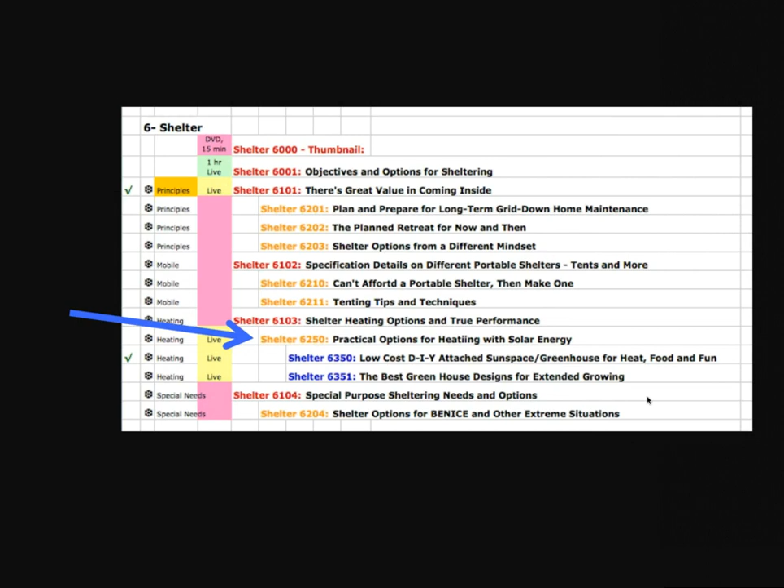Well, as you know, there's quite a long list of classes that we have been working on, many of them published or on the website, more coming. In the shelter area, this is 6250, which is one of my favorite topics, actually, because my career in years past was in the area of solar consulting and design work. The mission is to teach people as much as we possibly can to just reach out and help people get concepts of these things. And it's about the principles of how and why things work.

You see, provident living, I believe, has to be based on principles, an understanding of how and why things work, what the truth is really, not just lists of stuff. That's what's so important, because if you're just working off of a list or off of the library, so to speak, and it's not in your head and heart, then when you really need it, it doesn't just come up automatically. These 9 core preparedness modules I talk about all the time, everything that we teach is contained within them. All of the things you need to know, do, and have is contained within them.

One of the foundational laws for anybody that's new, the law of provident living, I believe, is the most important one of all. It has 4 parts to it: spiritual, attitude, knowledge, and stuff. It has to be in that order. I talk in great depth about that in some of these other principles in other classes, but just to set the stage so you understand why I do what I do, we mention them very briefly here.

The law of stewardship has 3 parts to it. I'm here because of stewardship. I believe you're here because of your stewardship to learn, to work in preparing for the future no matter what. The first part's authority, which we all have because we're alive. The second part is responsibility, and that is we have the right to act, and so we have to act. And number 3 is the one that we don't get to choose the outcome, basically. We control the outcome very often by what we do, but that's the accountability. It's the consequences of what we do and what we do not do. That's just simply how it works.

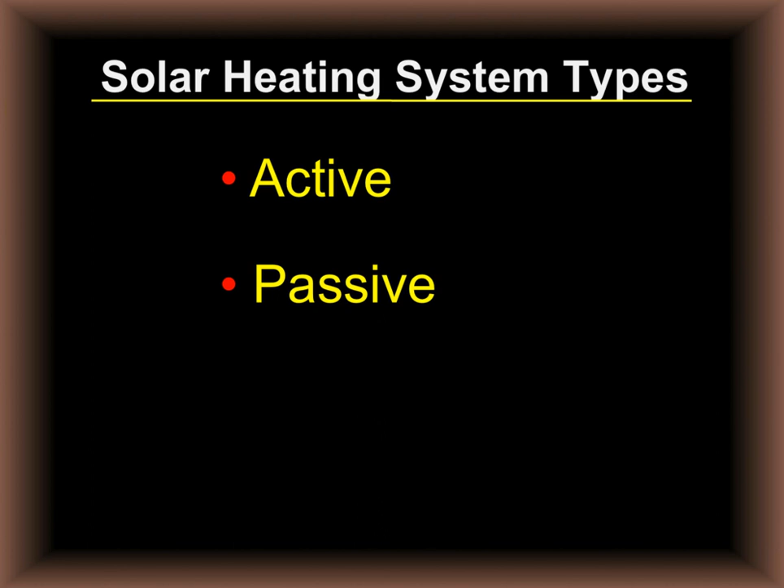When we take a look at these basic concepts dealing with solar heating, there's really two types of systems: an active system and a passive system. When we talk about an active solar heating system, this is one where you use electricity and other motive forces that help you select, control, and activate systems and equipment - things that collect the energy, store the energy, and distribute this thermal energy where you would want it. So you have these active components, using power of some sort to make it work.

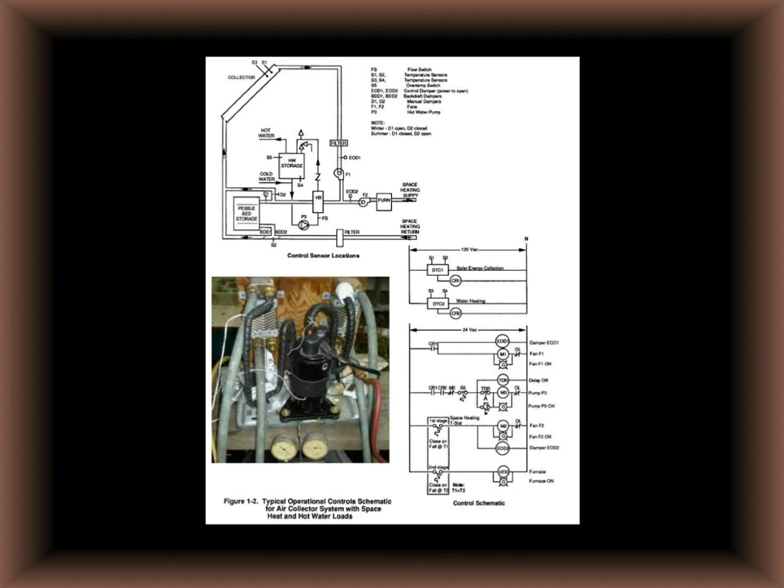So you have things like pumps, valves, thermostats, sensors, controls, and solenoids - those kinds of things. These are a lot of fun, particularly for a guy like me as an engineer. I used to enjoy designing these things, all those fun little things that you can put in there that make it work. It can be enjoyable, but one of the disadvantages is the more components, pieces, controls, switches, and valves that you have, that's more things to break, more things to shut down that you have to worry about maintaining.

You take a look at a passive solar system, and for heating, this is one where the thermal energy just automatically flows by natural forces. In other words, you don't have to do anything to move that heat, capture that heat, store that heat - it simply works because it exists, because it's designed properly. So we take a look at a passive system, and this is mostly what I talk about because there's such tremendous advantages to a passive system, and this is where I've spent all of my design work through the years.

I started out doing some things in the active area back in the 70s, and then very quickly decided, because of the complexity and some of the breakdown points in there, that I'd rather have something that will simply work because it exists.

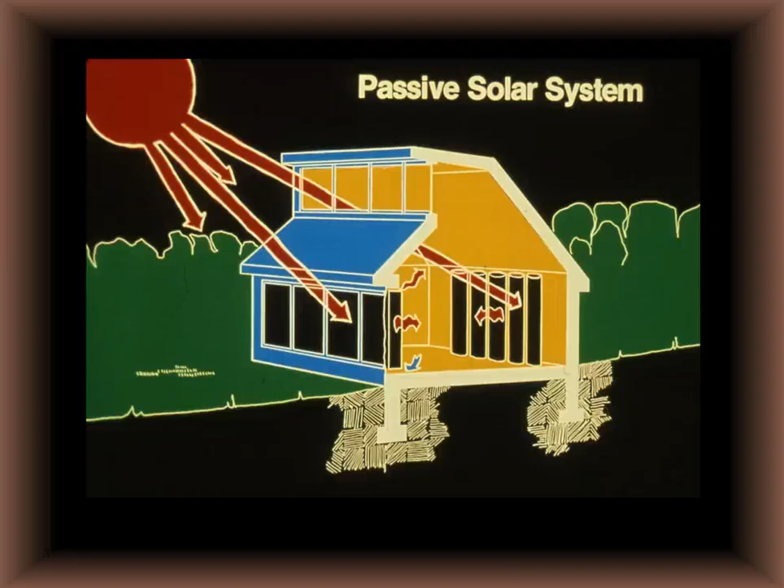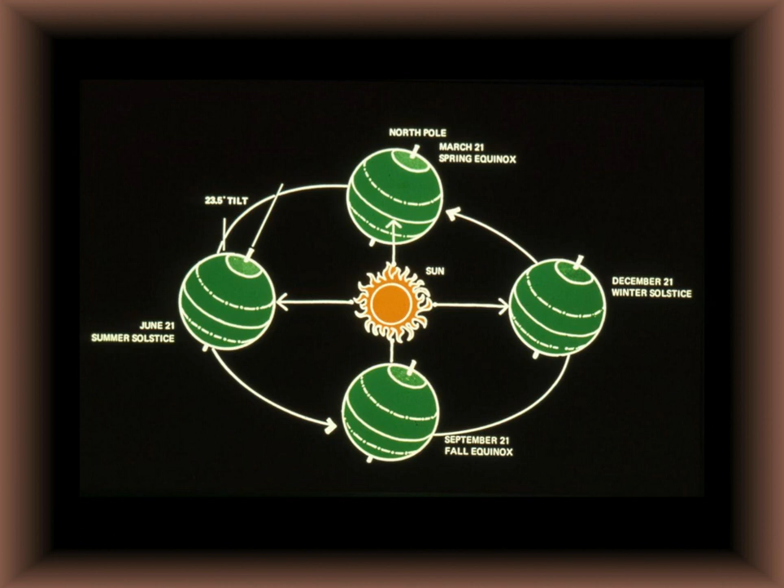When you understand how to make it work, you take advantage of the environment around you. One of the things that's critical for life on this Earth is this tilt of the axis of the Earth. It's about 23.5 degrees tilted off of vertical. That's what gives us the seasons, and the variety of life and comfort that we have on this beautiful planet. So we take advantage of the fact that we have this tilt, and the sun angle seems to change between summer and winter.

In the summertime, at high noon, the sun can be directly overhead, very high. In the wintertime, at high noon, it's going to be lower on the horizon. And the further north that you go, the lower on the horizon it will be in the middle of winter. We take advantage of that to control the heat input in the winter, and then in the summer to exclude it.

One of the other things that you have to pay attention to, particularly in a passive system, is the heat losses that we have. It's first and foremost about energy conservation. That lowers the cost of the things you have to add in.

This is really true with an active system, because if you have a house that's very leaky, not well insulated, with lots of air infiltration, you have to make up for it by putting in larger equipment. In the case of a furnace that runs off natural gas, that's no big deal.

I remember back in the 80s when I was doing a lot of solar consulting work and we were looking at retrofitting homes. I'd go to some homes that were built in the 50s, and some of these homes had really high utility bills, even back then. And literally the attitude was, we'll just put in a bigger furnace.

So they didn't do much with insulation, double pane windows, and all those things. It's just like natural gas is cheap, and a bigger furnace is cheap. That was cheaper than paying attention to those things. Well, we can't afford to do that anymore. And if you're going to be talking about having a solar system, whether you retrofit or build new, conservation is extremely important.

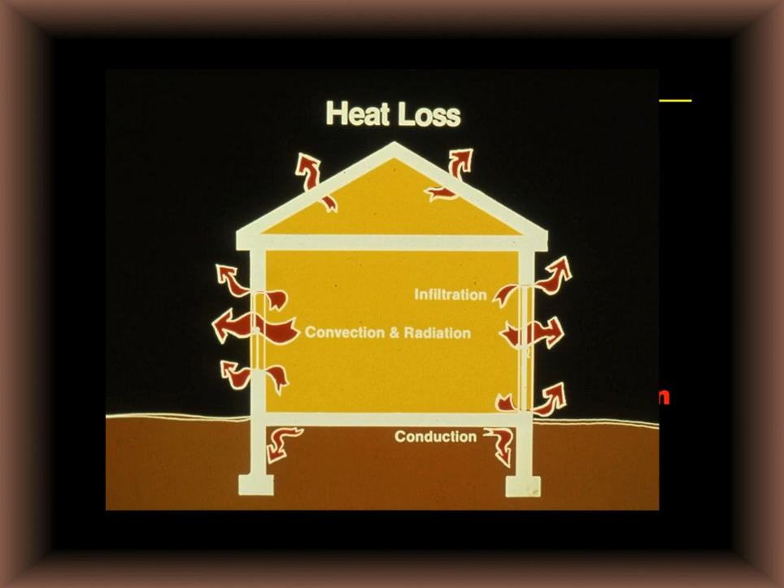Orientation, of course, is a big one. If you're looking to heat the house in the winter, southern exposure is what you want. If you live down in the desert southwest, you really don't need southern exposure. You're going to be more towards a northern exposure to help keep the house cool, especially in the summer.

You want to minimize the air infiltration. This is leaks around windows and doors and cracks that you have in the house, and many of our houses are quite leaky, and that air infiltration sucks up an awful lot of energy.

Window and door placement will have a real effect on how well the system can work. It's all about energy conservation. High efficiency windows and doors are more expensive, but in the long run they pay for themselves. Try to get the maximum amount of wall and ceiling insulation in.

Then consider things like movable insulation, especially for windows. Windows that are nice gainers during the day can be losing a lot of heat at night, even when they're double and triple pane. So movable insulation can be useful. And then there's a big one, in fact, extremely important.

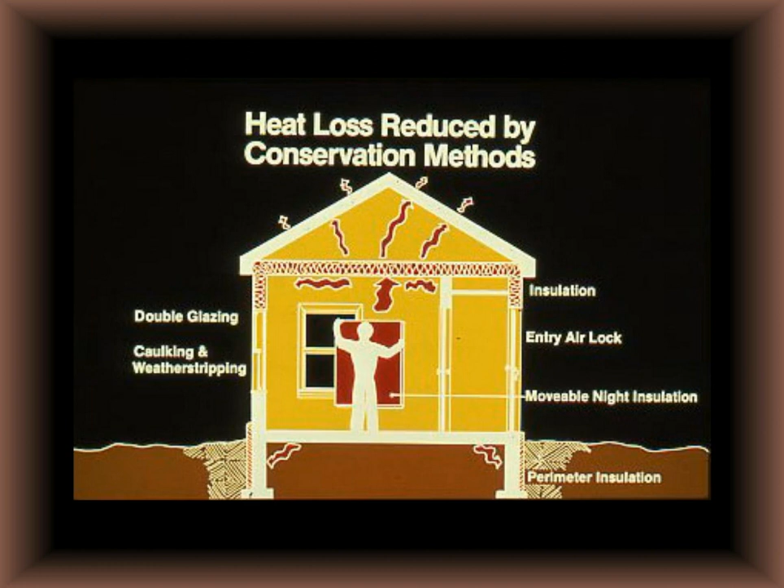Minimizing air infiltration is something you do. So you take a look at possible window upgrades and door improvements, movable insulation for windows, and then can you get more insulation in the house, in the ceiling, perhaps in the walls, perimeter insulation around basements, things like that you may want to consider doing to conserve energy, because that's where you have to start. Reducing the loss of energy by all kinds of conservation methods is important. As a matter of fact, even if you weren't going to be adding some solar components to your home, taking care of this heat loss would still be an important thing to do to reduce your utility bills.

Now, all solar systems have three basic major components: collection of the energy, storage of the energy, and then a way of distributing that energy. So we're going to look at how some of that works to help you understand, because here again, if you're wanting to either build a solar home or retrofit your existing home, the question will be: what can I expect? What is practical? What's possible? How much will it cost? So it helps to have some of these concepts in mind.

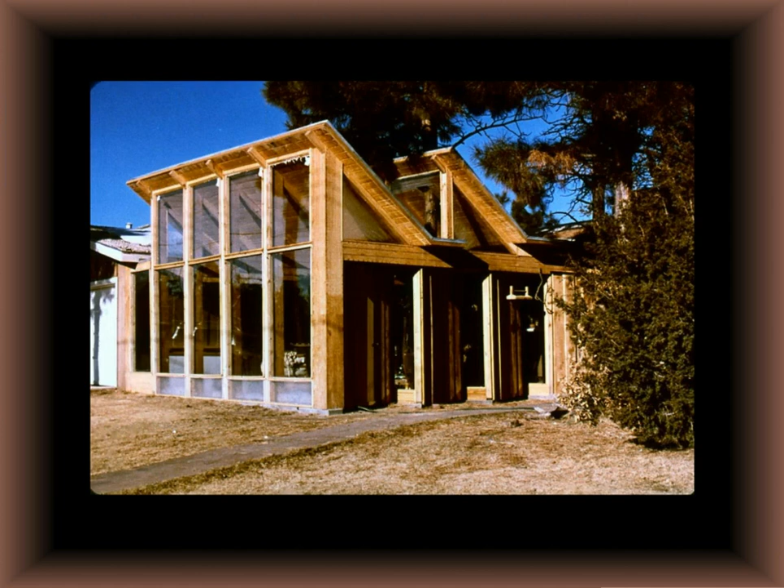Passive solar energy, just think of it as an automatic sun scoop. That's all that it is. Taking a look at some designs, there's a home, an addition to a home that's just designed to scoop up that solar energy and bring it right inside. Here's another one of these sun scoops, and another one here. We'll take a look at some of these homes a little more in depth as we go along, take a tour of a few of those. Just ways of bringing that energy into the home and being able to store it.

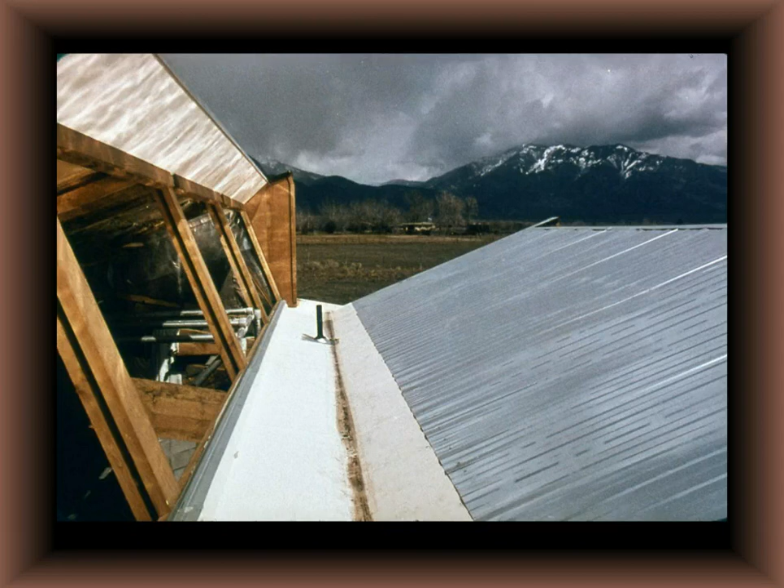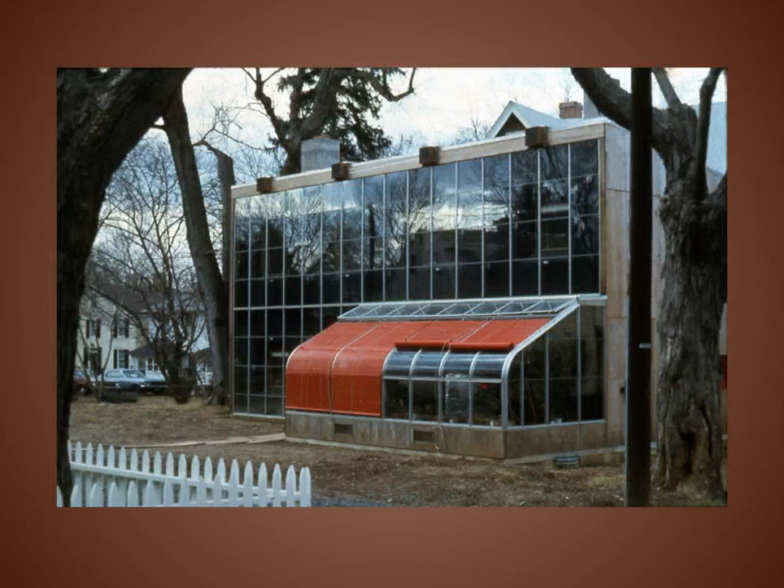Another one. Some of these homes, as I have toured them and been around them in New Mexico, Arizona, Colorado, Utah, different ways, you'll see different designs and different looks to these homes. Some of them very conventional in their look, some of them rather odd or strange in how they may in fact look. And you can even take existing homes and retrofit things to them, such as was done here on this home in Los Alamos, New Mexico.

All right, so we're going to be scooping up some of this sun. That means we're collecting it. And here again, the focus is just on these passive areas rather than the active ones that have all these powered components that would be a part of them.

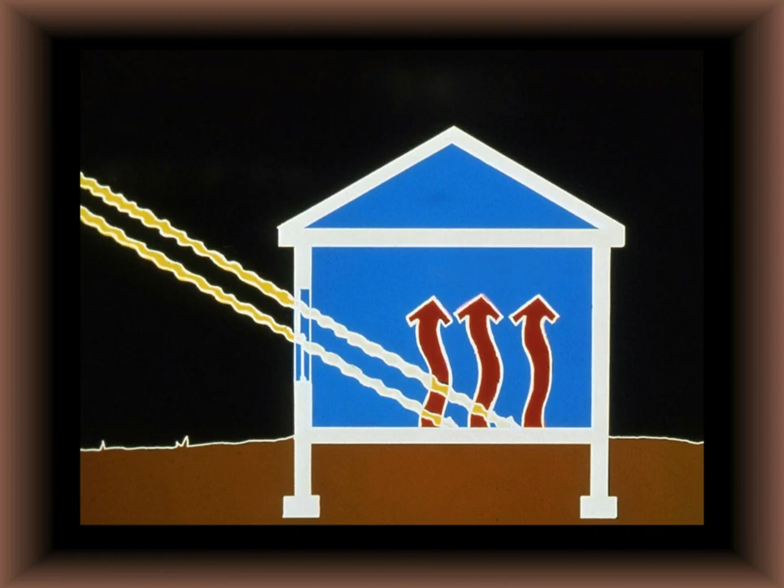The simplest way is we just take a look at what's called direct gain, just directly gaining that energy right into the house. It is very simple, it's a very universal approach, and as a matter of fact, most houses are already doing that to some extent right now. It's just allowing some of this sun's energy to shine through a window inside where it can warm up some of the contents in there. And if you pay attention to how you do that, you can enhance the performance.

So a window that just shines inside, this would be on the south side obviously. Add more windows, let them shine inside, warm up concrete and adobe and brick and things like that. More windows that bring in this solar energy and this heat. Whole walls could be made out of windows as it would be appropriate. So that's the simplest way: sunlight shines directly into the house, and your house probably does that right now.

Unless you had no windows, except perhaps on the north side, you might not have any direct gain into the home. One of the other things to consider that's important is this idea of movable insulation. When the sun goes down and stops shining, you need to trap the heat you brought inside, because windows and doors can be real losers of heat, so the overall gain is being reduced, or in some cases completely negated.

It can be very simple, and quite frankly very crude - just a panel of insulation that you stick in the doorway and over the windows come nighttime, or when it's very cold and cloudy. You simply plug that in and trap the heat inside.

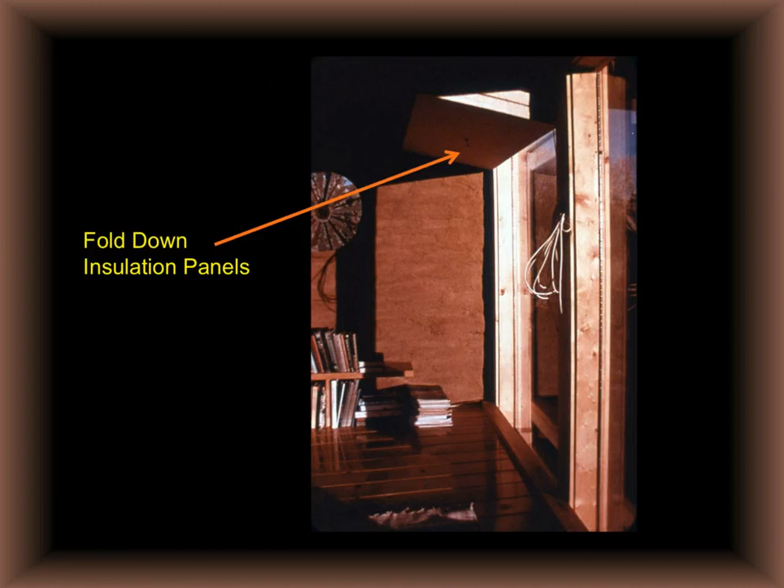Now you can do something that looks a little better and is more socially acceptable, shall we say - a much nicer way of doing it. In this case, we have fold-down insulation panels. They fold up out of the way, and come nighttime, you can see the cord hanging on the wall to the right there, and you just lower these insulated panels down. It closes off that window and traps the heat inside.

You can have roll-down insulated curtains that allow the sun to come in when they're up, and then trap that heat inside. There's a variety of ways of doing this.

Now, storage - once again in these passive solar systems, how do we store this heat? Well, simple terminology: we call it thermal mass. That's where we store the heat in something with heavy mass. This both stores the heat and helps stabilize the temperature within the structure, keeping it from going too high and also too low.

When we take a look at this direct gain situation, if you have a concrete floor, a brick floor, or a stone floor, you allow the sun to shine in and just warm it up - that's the thermal mass. You can also use soil and earth, and water, as part of those things. So floors are very often used, but you can also have walls.

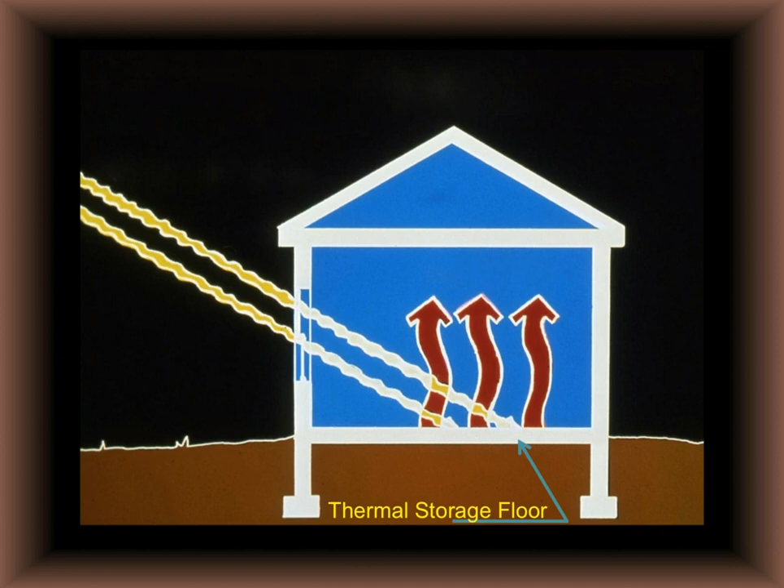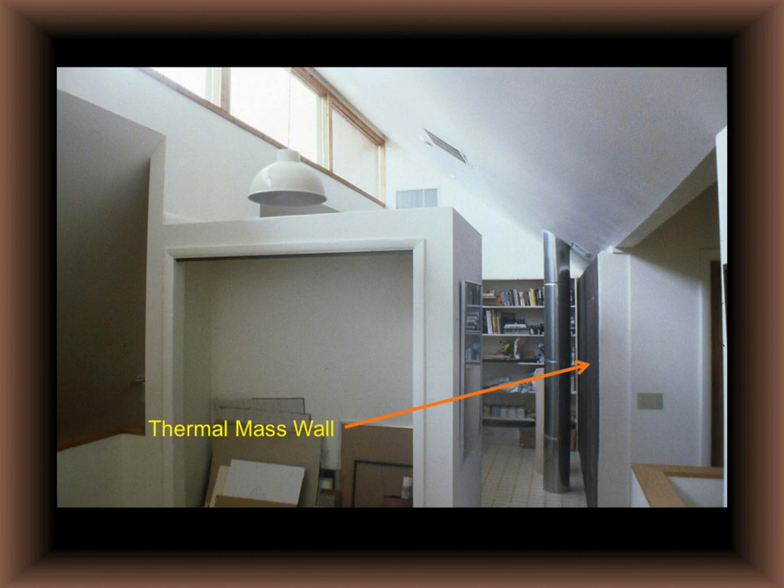Now here's a home in Cedar City, Utah, with one of these sun scoops designed to scoop up some of the sun and let it shine inside. You see the thermal mass wall in the back of this room. As a matter of fact, this concrete wall extends right up through two stories in this home because it's soaking up heat that comes in on the upper story as well as the lower story, and other amounts of heat that come into the house.

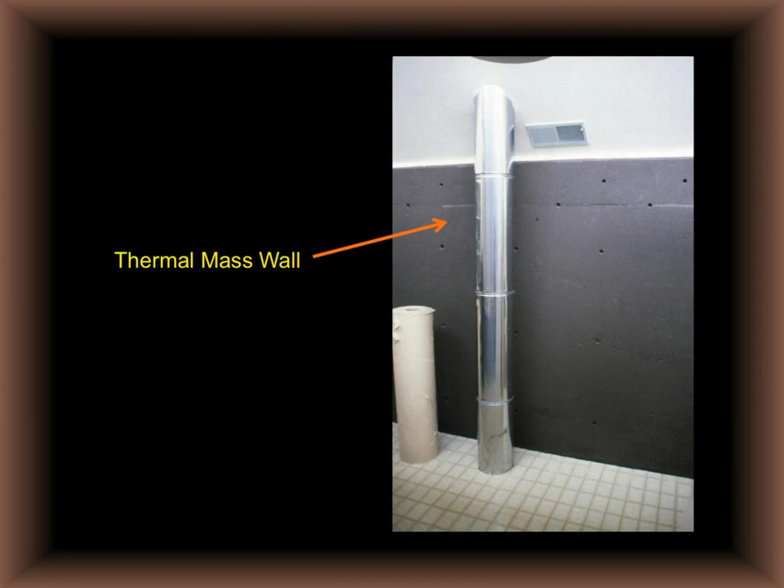You can see looking at it right here, it's very simple - it's just that concrete wall. The forms were removed and it's cleaned up a little bit. It's just been painted, in this case a darker color, so that it's better at absorbing the heat.

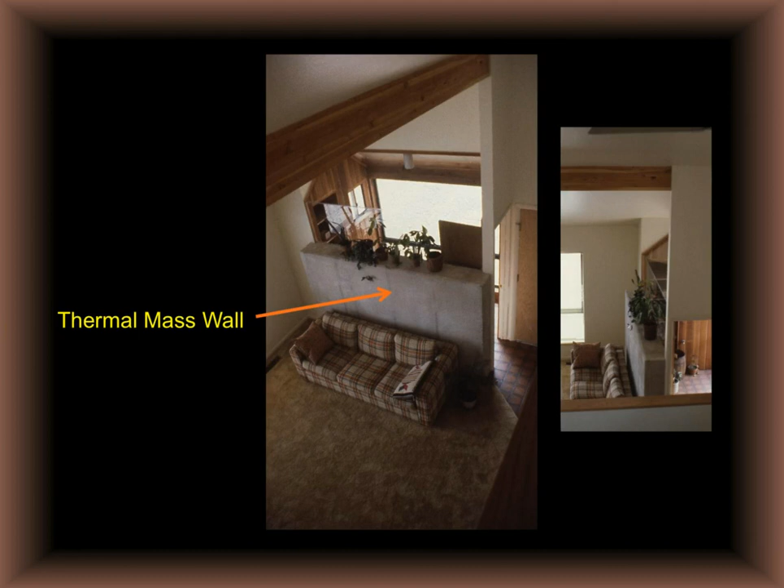Here's another thermal mass wall inside this house, using a partition wall, but in this case made out of concrete. That concrete picks up some of this solar energy and stores it, keeping the temperature in the room from getting too high, and then as the temperature in the room starts to drop, it gives the heat back to the room.

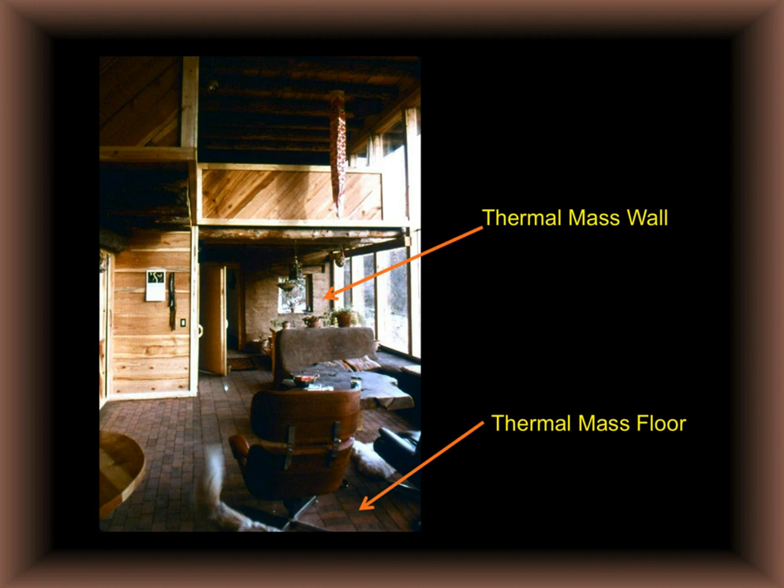You can use brick or adobe in walls. Here's an adobe wall in one of our homes that just allows the sunlight to shine directly in on the adobe. In this case, the adobe is sealed with a varnish so you're not getting any dust off of it, but it's just left exposed - it picks up that energy.

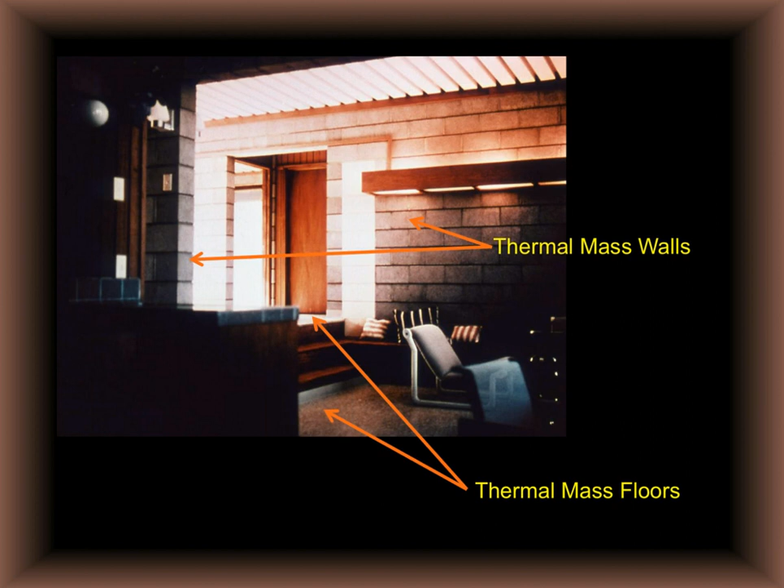You can use block and brick. In this case, you want to fill the block with sand, rock, or concrete inside, so you get just as much mass as possible, and you also have mass in the floors.

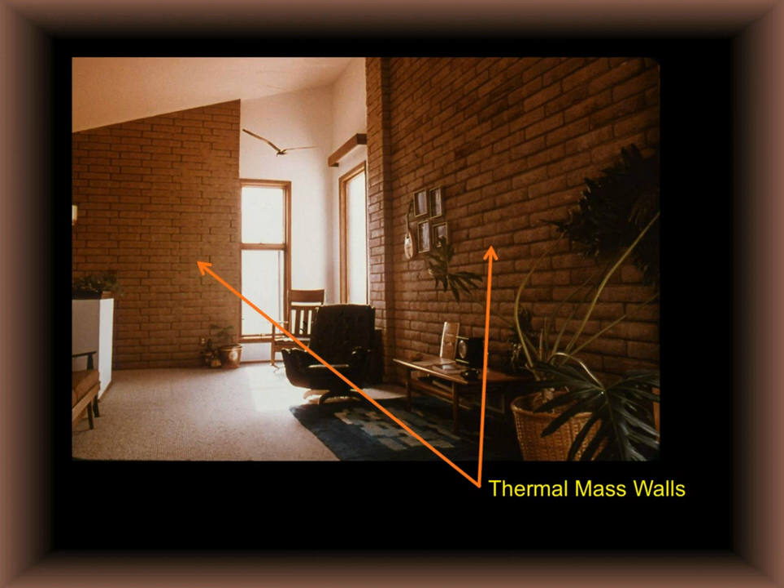Here again, more walls, and some of them can be very decorative, as well as having this dual function of picking up and storing energy. When we build some of these houses, we may use precast concrete panels like this that are then filled with sand or with rock. In one of them we had these walls like this, filled with cobble rock inside of them, and then we were able to move air up through them to be heating it.

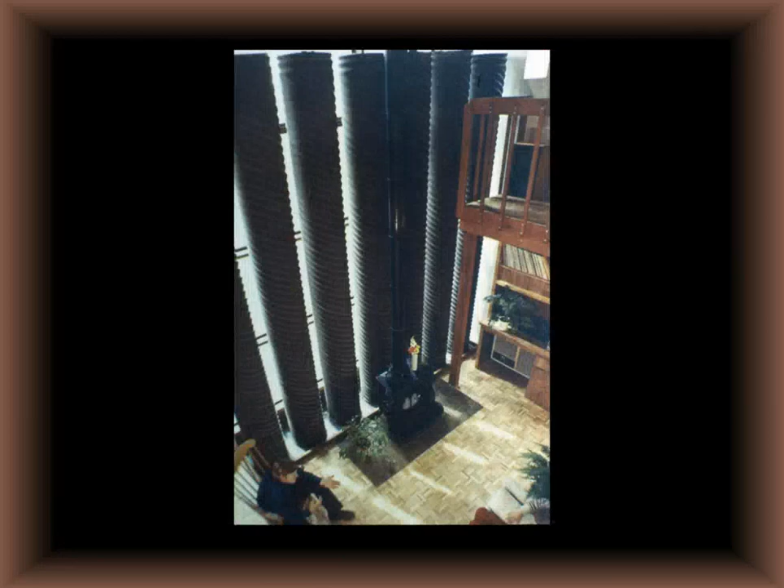Here's columns, in this case steel pipe, corrugated pipe. These are waterproofed in some cases, filled with water, or they may be filled with rock or with sand to give us this ability to store energy. In this case, it softens the glare of the sunlight because it breaks it up rather than having that entire window wall shining right into the house, which would be just an awful lot of sun sometimes.

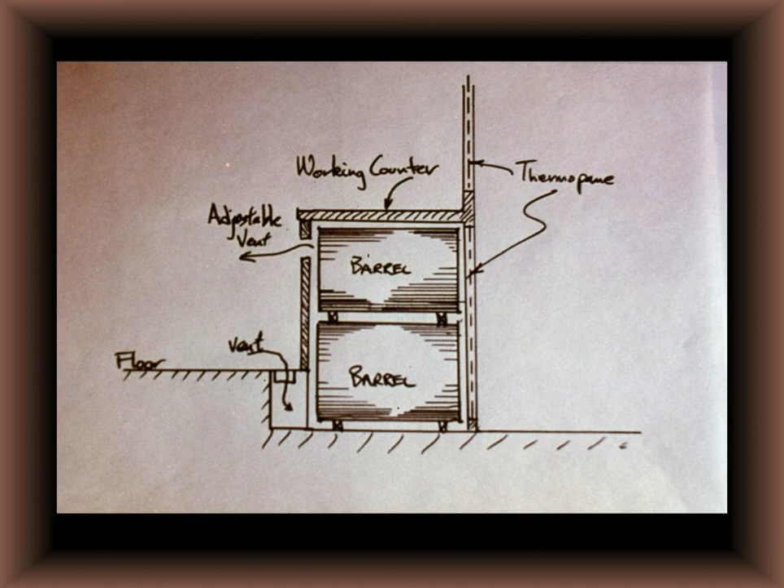We have other strategies that can be used. In this case, barrels. To the right, you see the Thermopane. We'll look at the inside of this in a moment. You have direct gain up above where the sunlight shines into the room. You have these barrels on their side that are filled with water, and you allow the sunlight to shine on them and warm that up, and then the heat can circulate through them.

When we look inside, here is what's a countertop, and it has those drums underneath that, and of course then there's the direct gain above it. So these are simple things that could be done. This is a monastery up in northern New Mexico.

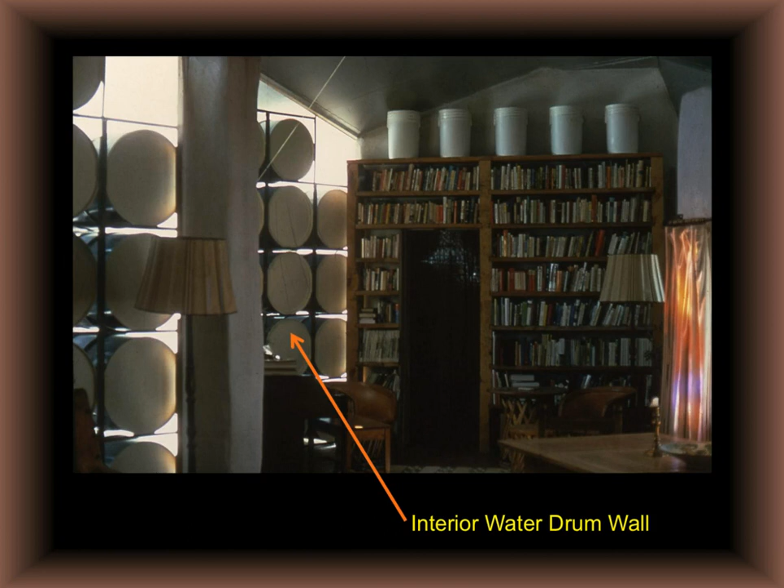Other ways of using drums of water, here they are in racks in a house. This house has movable insulation on the outside to close it up, but during the day when you can gain energy, those insulated walls are dropped down on the outside. Sun shines on the barrels, warms up the water. At nighttime, the walls are closed on the outside, and it traps that heat inside that's radiated into the room.

One of the things that's very important when you're dealing with passive solar is, of course, insulation is important. If you're looking at basements, very often we just bury the basement and try to insulate them on the inside so that you don't feel that cold concrete. Well, the concrete's kind of cool because it's in contact with the earth that's running in 58 to 60 degrees.

Where we have a passive solar home, what we really want to do is put good, heavy insulation on the outside of that and then bring that thermal mass inside of the house, so that those concrete walls of a basement, or it may even be above ground if they're concrete walls, I want that mass on the inside absorbing that heat and giving it back to me.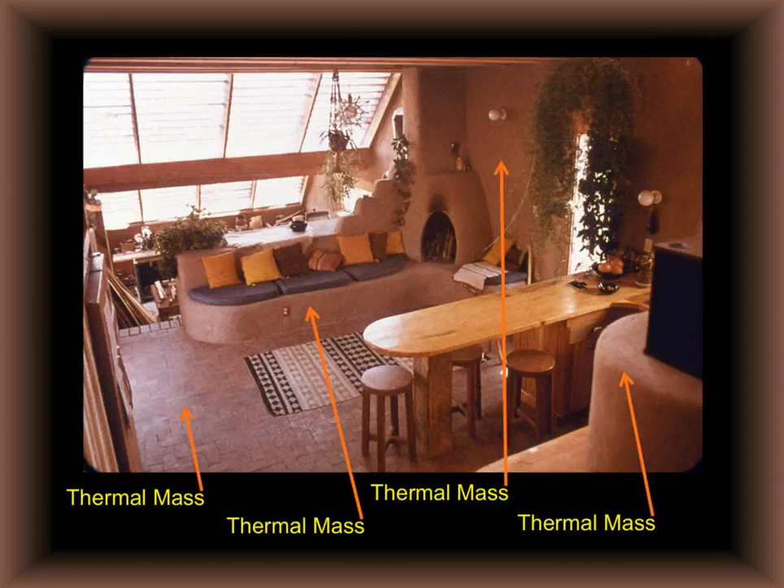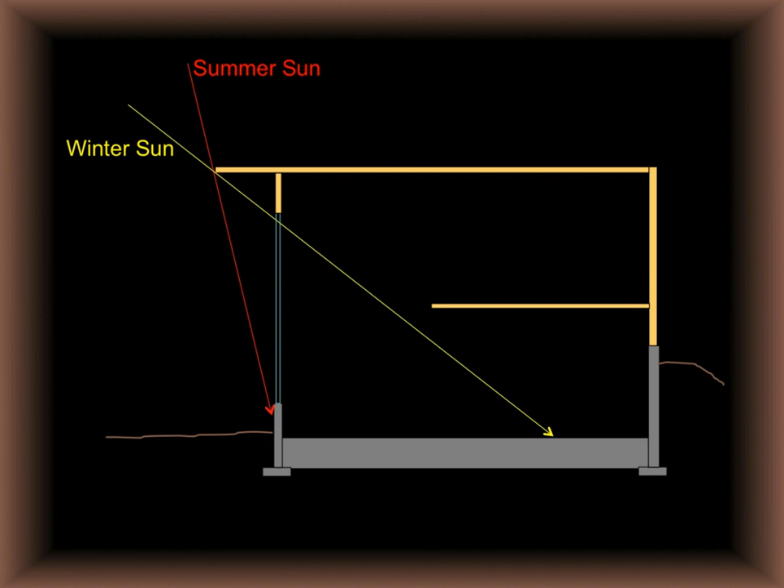The summer sun being very high, the winter sun being much lower, and by having an overhang at the house and calculating it properly, it allows the winter sun to penetrate deep into the house, and then as you go into the spring and into the summer, as the sun is becoming higher in the sky, that overhang, that shade cuts it off. It's automatic. You don't have to do anything in this case.

All right, so we have ways of collecting it, just bringing it directly into the house, warming up mass inside of the house, whether it shines directly into the living area or it shines onto a wall. It's a very simple way of both collecting it and storing it. Now we need to distribute it. Well, distribution is pretty simple, and since this is a passive system, once again, we're going to move this heat by natural means. That'll be convection, radiation, and conduction. We'll use all of those.

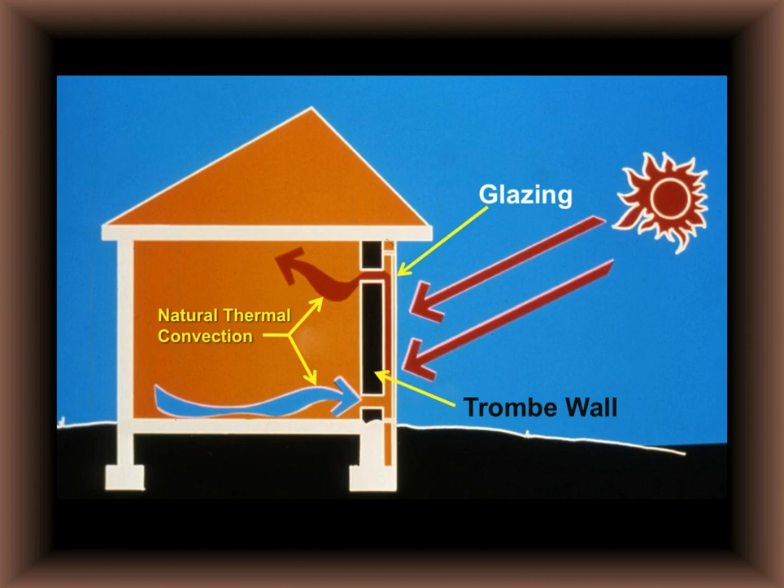The other way of doing it, I mentioned this one, is a Trombe wall, where you'll take your mass wall made out of concrete or brick, put it just inside of the glazing, allow the sun to shine directly through. Usually the gap is about 6 to 8 inches. And then you have these penetrations at the top and the bottom that will allow the warm air to rise into the room and the cool air to come off of the floor.

Here's a schematic of one of them, where you have your concrete or your block wall, double glazing, and you get this natural convection, this thermal circulation that's going on. Plus you also get radiation into the house, the thermal radiation that will come into the house. You see that there's a thermal lag time.

When the sun shines on that concrete, let's say it's 10 o'clock in the morning until 2 in the afternoon during the biggest gain periods in the middle of winter, and it's shining on that concrete warming it up. It's usually painted dark. You're getting some of this hot air that's collecting in there that circulates into the house, but also that thermal mass is being warmed up. Now, it doesn't pass right through. As a matter of fact, the lag time is about 6 to 8 hours.

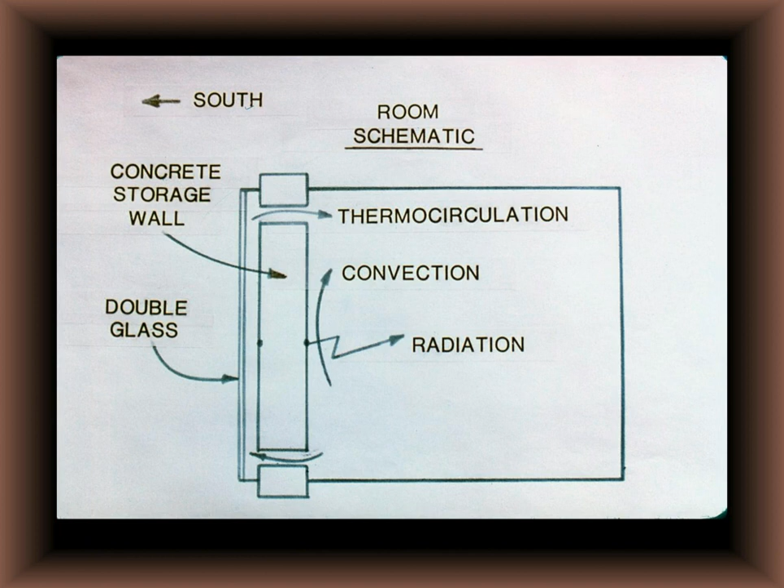So the highest temperature that's going to be on the surface of that concrete where the sun was shining on it finally penetrates through, and about 6 to 8 hours later, it's now come through to the inside of the house, and that just happens to be when it's dark, when the sun is down, so you're getting some of that thermal radiation into the house, plus it also gets some thermal convection going on the inside. Here's one of these walls. You take a look on the left over here.

We're looking at the outside through the glazing, and you'll notice the bottom thermal siphon openings. The orange arrow points to them, both on the outside on the left, and then on the inside of that room, you see them there. And then up at the top, you have these ports that allow the warm air to come into the room.

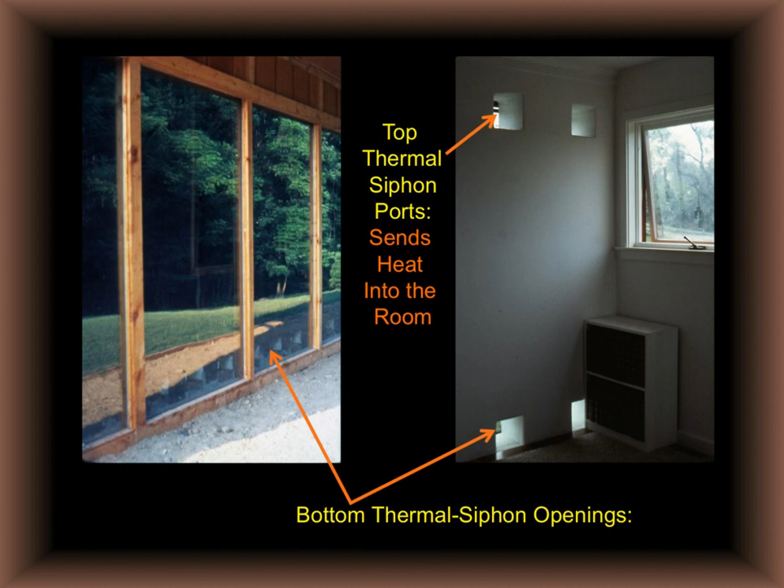So during the day, when the sun is shining, it's warming up that air gap that's in there, warming up that concrete. Some of that air rises into the room, warms up the air in the room. As it cools, it settles down to the floor, and it's drawn back in through those lower vents down there, and that cooler air is then warmed up, and it circulates back into the room.

This is natural thermal siphoning of the air. Warm air rises, so it rises up. As it cools, it settles down, circulates through the house. No pumps or fans needed for that. So you see this room looks fairly normal on the inside, except you have these holes in the door, in the wall, that allow the heat to go through it.

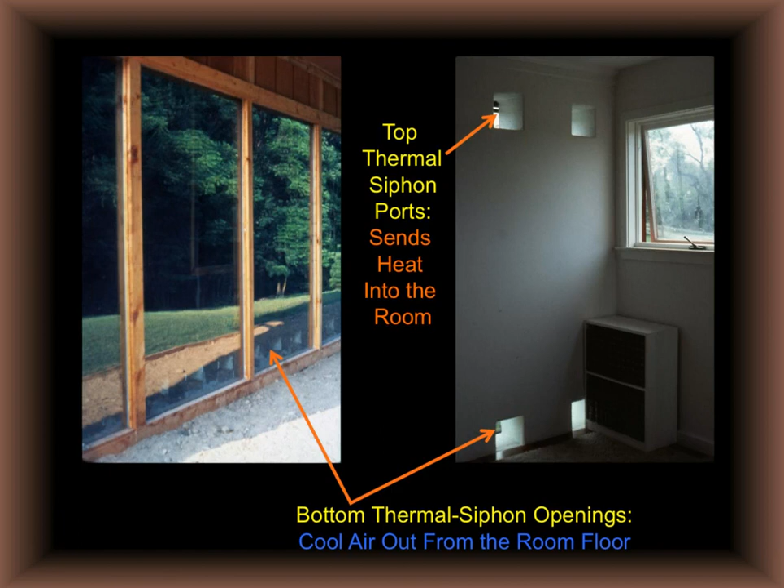Now, you may want to stop the reverse action. You see, during the evening, when the sun is gone, that air gap on the outside of the Trombe wall is going to get chilly, and so the warm air on the ceiling is going to be pulled in. It's going to be cooled as it runs down the glass, and it'll come into the room. You don't want that to happen. Here's a very simple way of taking care of that.

This is an automatic thermal siphon reverse flow damper. Thin little piece of plastic that's taped on. I mean, it costs next to nothing. And as it tries to reverse siphon in there, it simply closes. And then when it warms up during the day, and once it is warmer on the glazing side on the outside than it is on the inside, that damper just opens up with the natural pressure of that air that circulates in. Very simple and just about free. No fancy valves or anything needed for that.

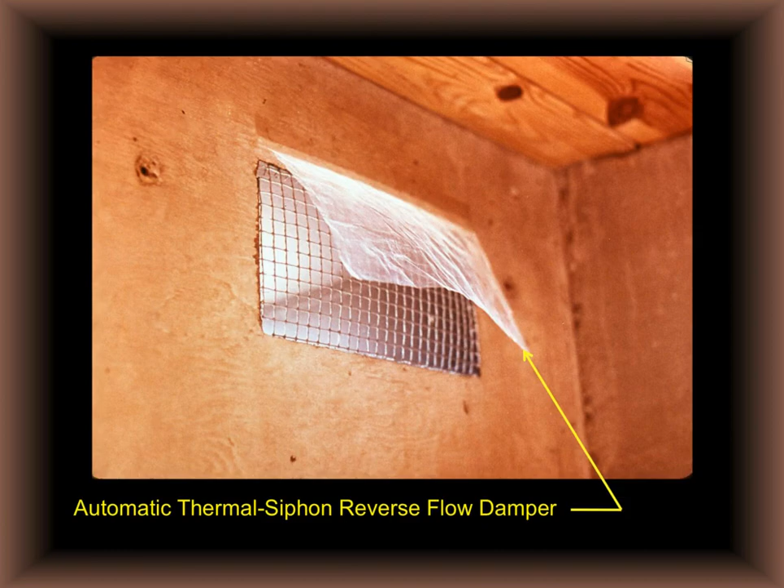Now, if you have a fan, you can move even more air. In fact, very often we'll use a little bit of a fan to move some air. But when the utilities go off, it will still work just fine.

One of the other things to consider in passive solar heating is that particularly in a very cold region, you'd like to build your house in as warm a spot as you can find. Well, in this case, we're talking about the Earth, because the Earth is going to be much warmer than the surrounding air. In the winter, you might have air temperatures of 10, 20, 30 below zero. You get down 3 or 4 feet into the Earth, and it's very stable temperatures, 56, 58 degrees, depending on where you live, up to around 62 degrees. So you build your house in a warm spot.

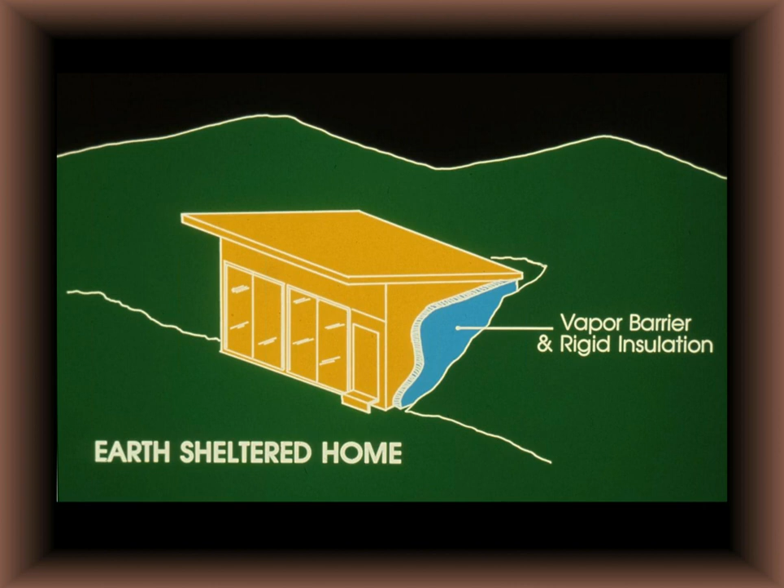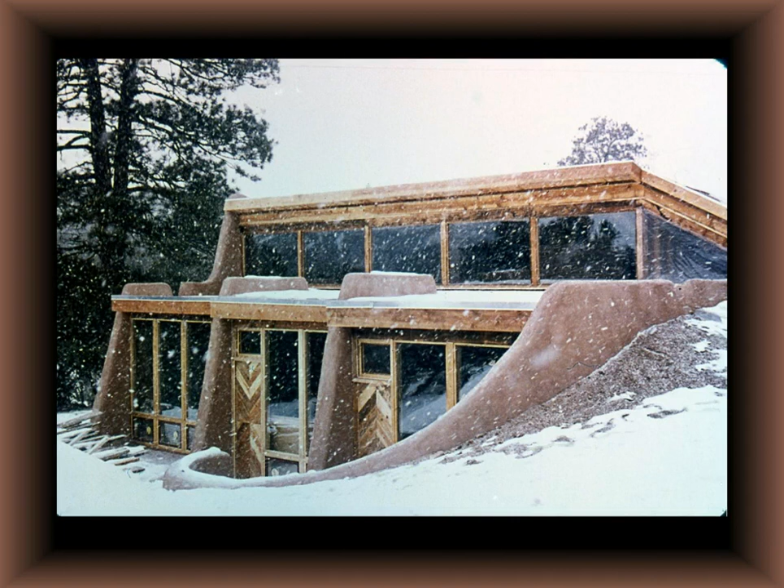So it can be partially bermed, or you can even start burying the house completely. Here's another one in northern New Mexico where the house is almost completely covered in earth, and others like this. In fact, it almost looks sort of conventional on the one side, but yet the north and the west sides are quite covered up with the earth. You can have completely buried homes, completely earth sheltered.

One of the other things to consider is where you would put the collection, the storage, and the distribution all combined into one in a very simple system for capturing, storing, and then giving that heat back. We call that a sun space or a greenhouse. These are a lot of fun. They're also great for heating, and they can help you provide food because now you have a place to grow things.

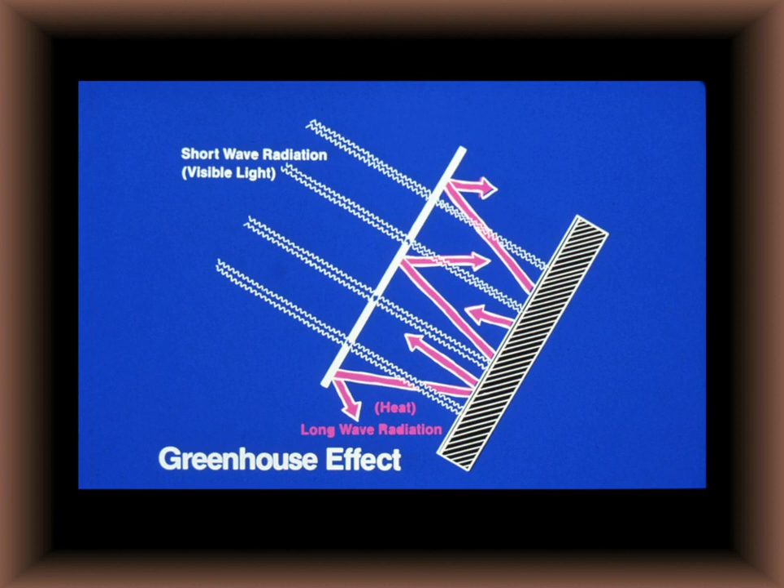This greenhouse effect, we hear a lot about that relative to the Earth because it actually is a very important part of maintaining the Earth's temperatures in the case of using clouds and water vapor. Now in our case, when we're designing something, we're going to be using glazing, glass or plastic. So you have the shorter wave radiation, more in the visible range, ultraviolet to the shorter infrareds, shine through the glazing, they shine on a surface, they heat it up, and in the process of heating it up, it's changing that sunlight energy into long wave infrared, and glazing, glass in particular, is very effective at reflecting that back, trapping it inside. Hence we have the greenhouse.

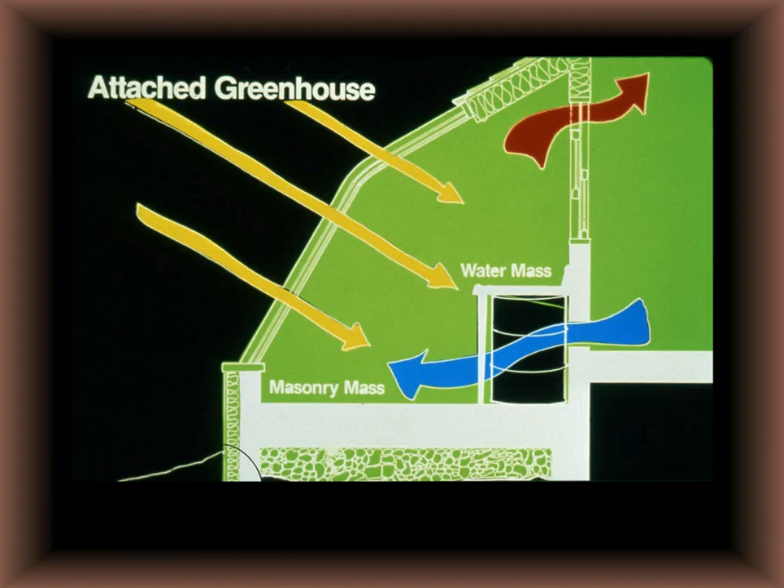You attach one of these to your home, and this is an excellent way of retrofitting an existing home on the south side of the home, and I'll show you a number of pictures of those, where you just attach a greenhouse on that south side. Now you have a sun space and a room and a place where you can grow things. You'll want to be capturing the heat, so you'll be using masonry. You can use drums of water, brick, rock, a variety of things like that. Notice on the lower left-hand side over here how you have the insulation that's on the outside of the masonry mass that would be a part of this greenhouse.

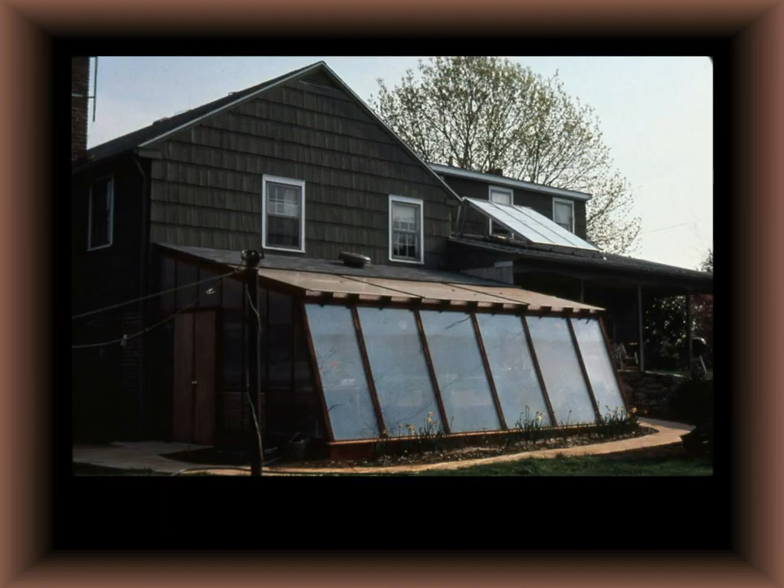Here's one that was added onto the south side of this house. And you take a look at the inside of it. Here's what it looks like on the inside. And a wonderful place to be growing plants. And if the conditions are right, you can be growing things throughout the winter.

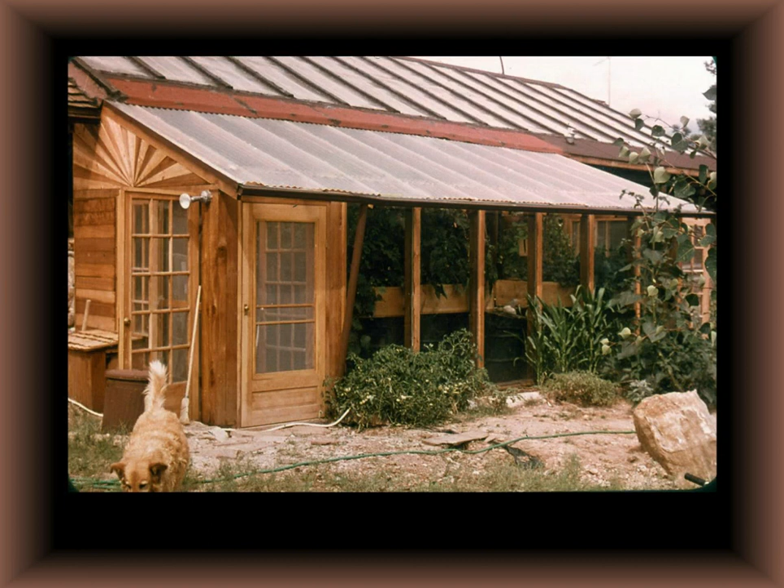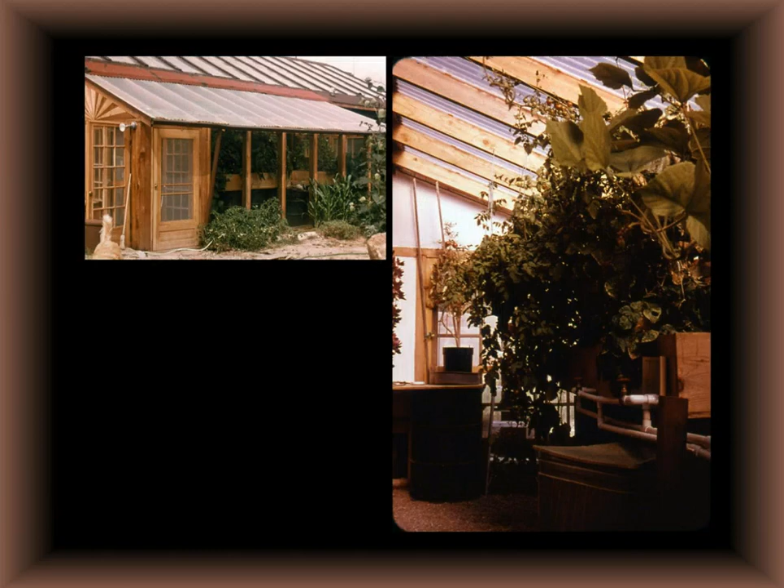Other attached greenhouses, they can be simple. They can actually be fairly crude, and you might even think of them, well, as ugly. But, you know, it's not about the looks. It's about the performance that you're getting from it. It's the benefit that you gain from these. And particularly where budgets may be tight, you might not be looking for something fancy. You just want something that would work very well. Here's what it looks like on the inside with all of the greenery and the plants. A wonderful place to be in the middle of winter.

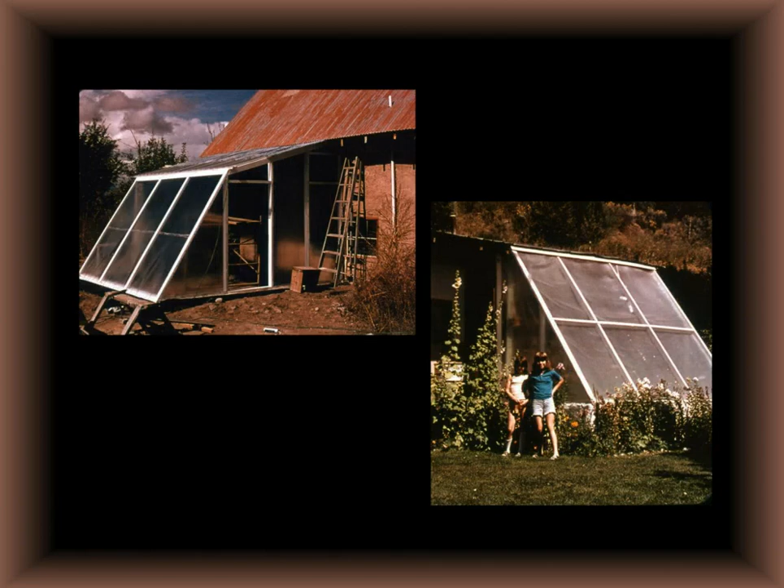Here's another one that, well, doesn't fit the architecture of the whole neighborhood around there. They added this one on the house. This is in New England where this one was. It has this very nice greenhouse added to the side also. There's a big Trombe wall there, and then you have this greenhouse. Looking inside of the greenhouse, this is what it's like in the middle of winter. A very enjoyable place to be. Add-ons like this, simple, yet very, very enjoyable in the winter.

I'm a real advocate of having things like this on your house, whether it's a house you're building new so you can build the house around a sun space greenhouse as was done here, or something you retrofit. I'll give you another concept, something low cost and functional. This is a simple do-it-yourself retrofit, and it can be moved.

We did a class on this a while back. It wasn't recorded because I was just developing the class anew. I used to do solar classes all the time as part of my consulting work, and we'll be doing more of those in training, recording that class in the future. It's building what some people would call a pillow wall, an inflated wall like this.

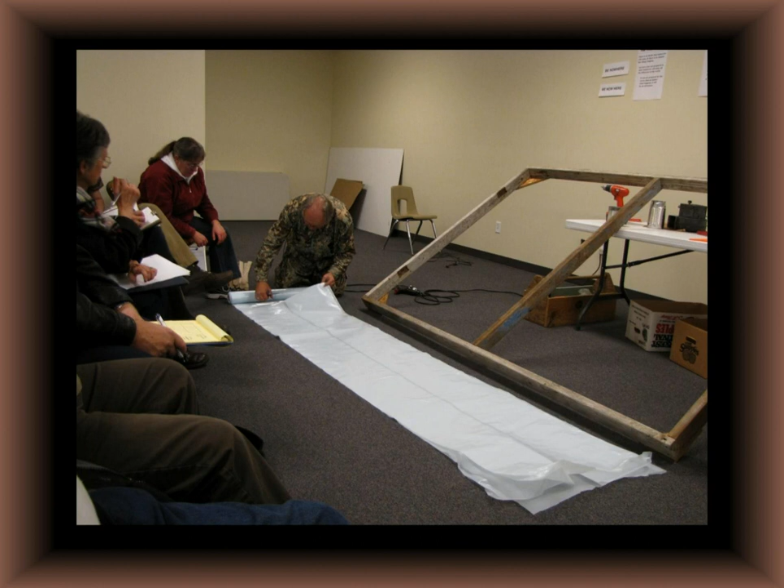Very briefly, let me give you the concept. These are pictures taken while I was doing this live for our students in Linden, building a frame using this plastic that's stapled and taped onto it. We have 2 layers on there, this inner layer that's stapled on the outside, taped onto it.

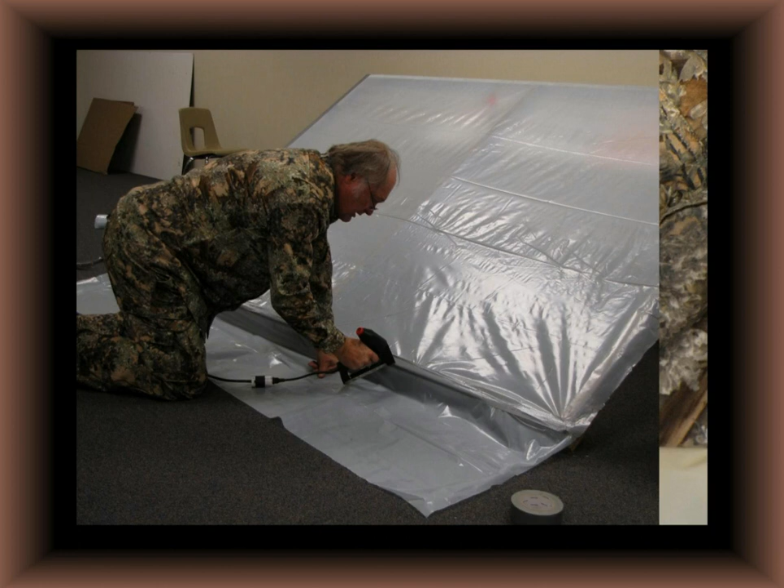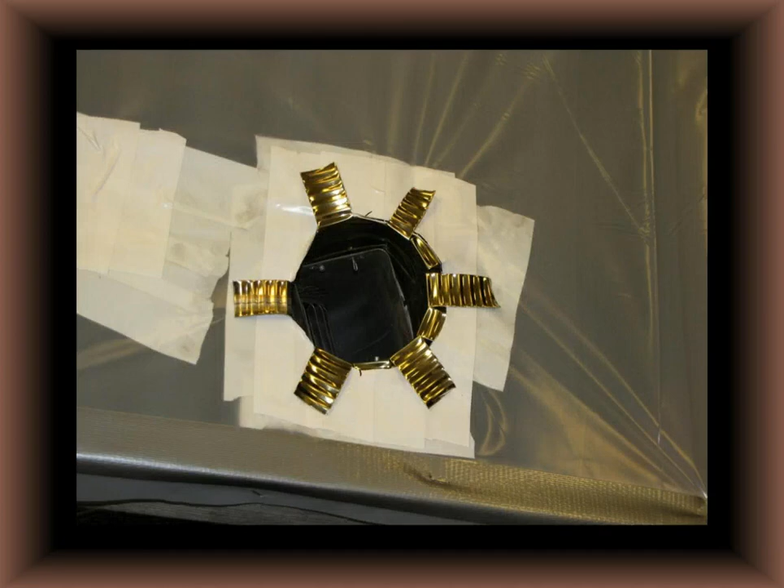I need a way of pumping air in between them, so I'm using just what I had around, a fan and a tin can that you cut and attach. I showed very simple ways of attaching it through the plastic, then putting the outer layer of plastic over top. It's both stapled and taped, and then you have batten boards that go down over top, screwed on so that this will hold up.

Because if you're doing this with the plastic, it's good for 7 years, I want the frame and attachments to hold up too. Here you see it with the air blown in between the two layers, and the pillow that's on there, the underside being pushed in, the outer side being pushed out. It uses very little electricity because that fan is running at a static cutoff head, just to maintain the pressure. There's no air flowing through it because it's a sealed space; the fan is just puffing it up to hold that plastic rigid.

Here you see the inside with the plastic that is puffed in, and on the outside it billows outward. So there we have a simple way of doing that. You can build those panels all along the south side of the house. I wanted to give you that concept because it's not expensive, you don't have to spend tens of thousands of dollars to do these things.

A little bit of scrounging, a few hundred dollars, some skill and some tools—you'd be amazed at what you can do and how much heat you could add to your house. I've got to find a bunch of slides I have, never digitized them. The first one I built and added to our home in Pleasant Grove, Utah, we had a 2-story one there. It covered a large deck over top of a double garage, and it went up two stories. It was an absolute joy.

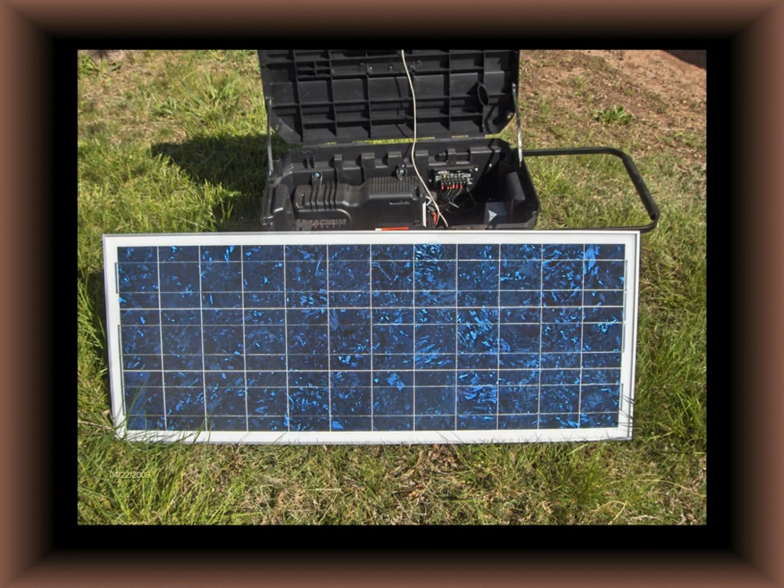So this modest amount of electricity from sunlight would be something important to do, and that's where you'd have a small system. We're not trying to power your house—we want to run a fan, and I want to be able to run that fan through the night and perhaps through a couple of very cloudy days, keeping that plastic taut. We'll be repeating this solar power class in the not too distant future so you can learn more about how and why these things work. So a little modified system to run the fan and some other appliances around the house could be very useful.

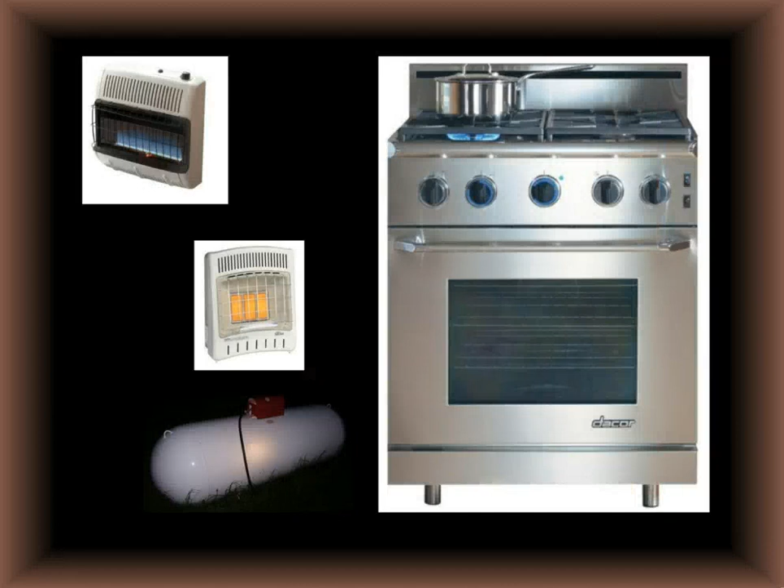Supplemental heat is something you would want to have in your passive solar home. This is for off-the-grid applications, and you're going to back up your backups—you want to understand what your options are and have several of them. One that a lot of people will use, of course, would be something like propane. We might have natural gas right now, which does a great job, but what happens if the natural gas is off? You can store your own propane in tanks, and you'd be able to run some radiant heaters, run stoves, furnaces, and things like that.

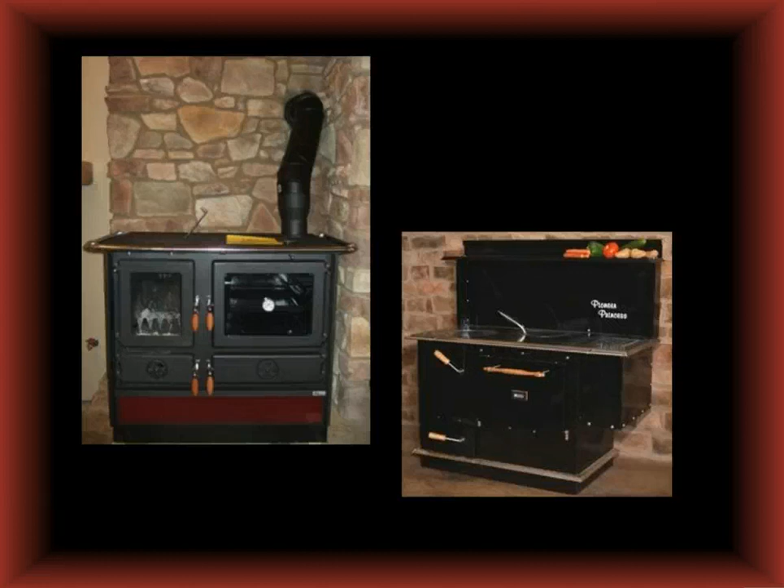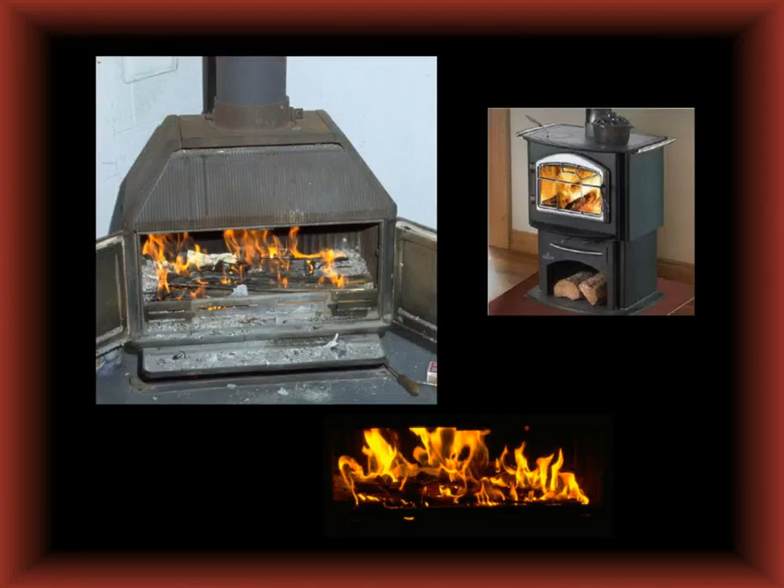Then you back that up with a biomass appliance. Biomass, wood, is the primary thing you may in fact be burning. You could also be burning coal, depending on where you live and what you have access to. Now you have a way of both heating and cooking, so this is a wonderful backup option. You can have things like just the fireplace—the stove is primarily for heating, again to allow you to keep things comfortable, keep the chill off. If you have a house that's very efficient, because part of the solar heating is having a very efficient home, then having a little bit of wood-burning appliances in there can do an amazing job keeping things very comfortable as part of your backup.

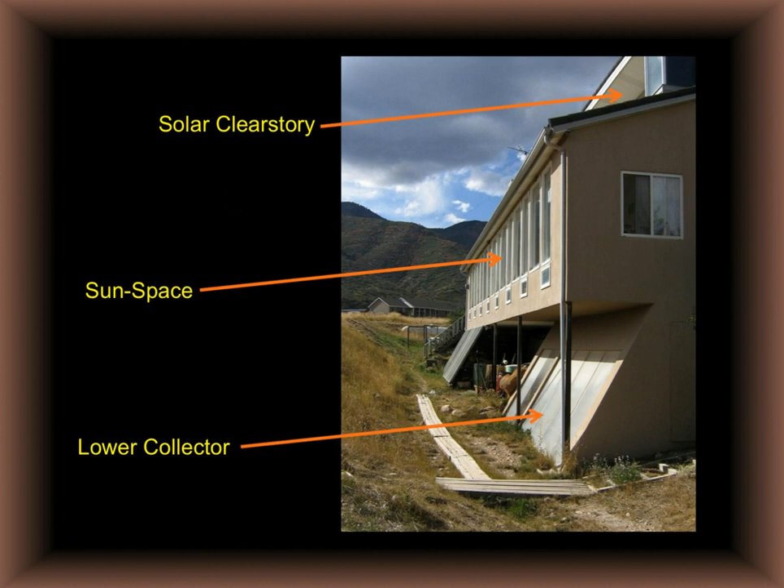I'll take you on a couple of house tours here on some passive solar homes. This solar home is in Sanpete County in Utah. This one's been in use for over 10 years, and it's very off-the-grid capable—it uses very little utilities now. If the utilities go away, it will be just fine. Here you can see some of the things we've been talking about. This is the south side of the house—you have a lower solar collection area there, you have the sun space up above, a greenhouse sun space, and then clerestories up above.

You look at the summer overhang to shade that lower area down there. And then it also has a solar chimney, a trick I've used where in summer particularly, you allow it to get screaming hot, heating up that air. That air wants to rise out of there, so now it can pull the hot air out of the house.

Very often we'll use an earth tube, which will be concrete or steel pipe, but I prefer to use concrete that's buried into the ground and pulls air through that concrete pipe, adds a little bit of humidity to it, and cools it down nicely, draws it into the house. Here again, no fans. It's all done with solar energy, with this thermal siphoning that wants to go on.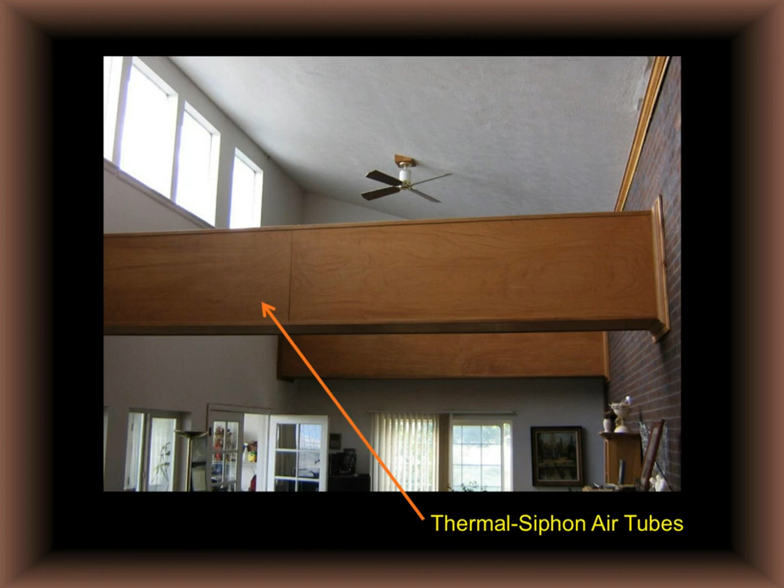Here's the clerestory up above, and here are these thermal siphon air tubes, with very large cross sections. They allow the hot air to come out of that sun space, and then circulate it into the north end, where it can dump that heat and draw the cooler air out of those rooms back up into the house.

You see here the thermal mass wall, the concrete and brick on the inside, allows the sun to shine on that. Here again is another picture of those thermal siphon tubes that allow the hot air to be drawn back into the northern areas of the house.

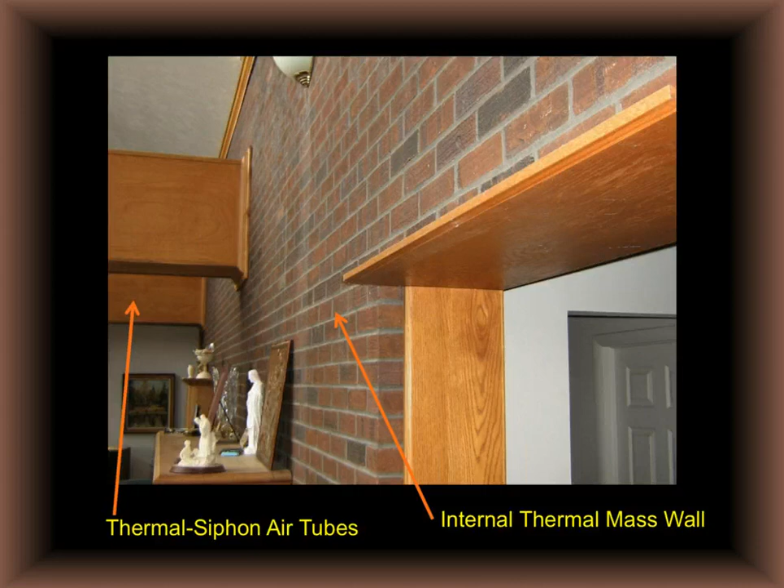Very high efficiency type of stove, you want it to be closed, regulate the air that goes into it, and you also like to have fans on them to help circulate the air. As long as you have power, and this house does have backup solar electric power, you can run that fan all the time.

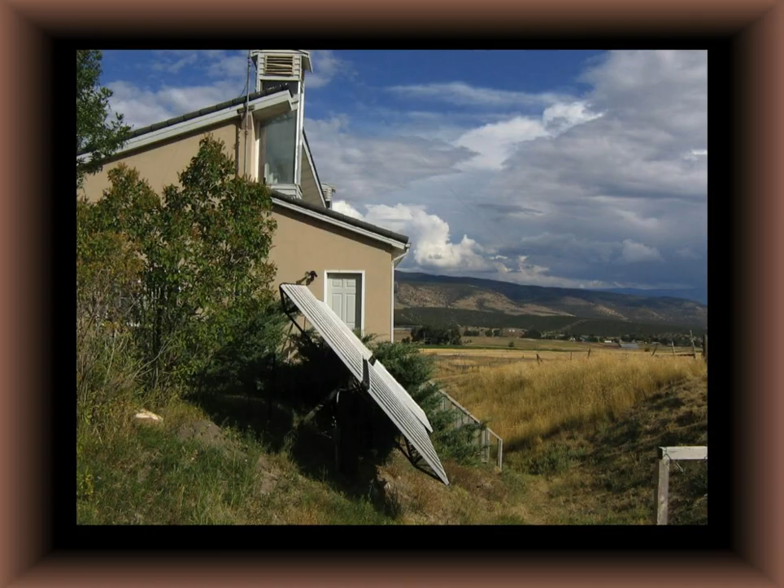Here's looking to the east along the side of that house, the solar chimney at the west end, and the photovoltaic panels associated with the house.

Here's another house in Sanpete County that's under construction, being built in phases. This is one of my favorite ones because I had a little bit of input into the concepts that are going to be used in this house.

It can be done in 3 phases. Phase 1 is what's going on right now. The house is to be completed for occupancy about June 15th of this year. It has radiant floor heat, wood stove backup, gray water recovery system, and a full backup photovoltaic electric system. It has a moderate to good high thermal efficiency, and the house is built well.

Now for the phase 1 initial solar performance, I'm very conservative in my estimates. If you wanted to maintain a normal lifestyle, with the temperature at 72 degrees without fluctuation, using utilities to make up the difference, this house will carry at least 30% of the heating utility with solar. It may in fact be higher than that, but I'm very confident in 30%.

Now, if you'll adapt your lifestyle a little and allow the temperature to fluctuate, and if the power was down, with no utilities and no backup like a wood stove running, that house is going to stay above freezing even in the worst part of the year, when it's very overcast, cloudy, snowy, and temperatures in our area go below 0. That house will never go below freezing. It'll get chilly, maybe 35 degrees, but it'll maintain nicely without backup. Of course, turn on your backup and you can bring that temperature up and make it much more comfortable.

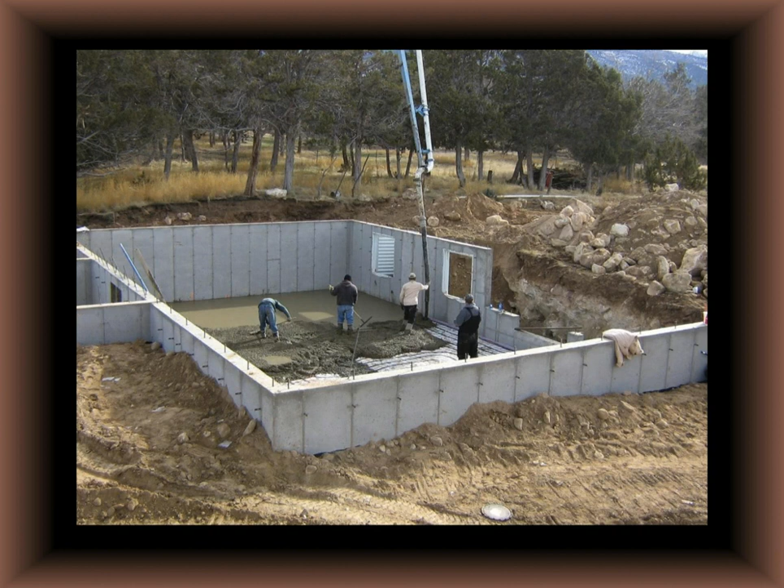The site location for this home, then you see footings and foundations going in, this house rising. It's been a lot of fun to watch. It's in my neighborhood close by, so I can keep an eye on it as it's climbing up, and you start to see some of the features about the house. Some of these features are very important to me, something I wanted to see done. This is the basement.

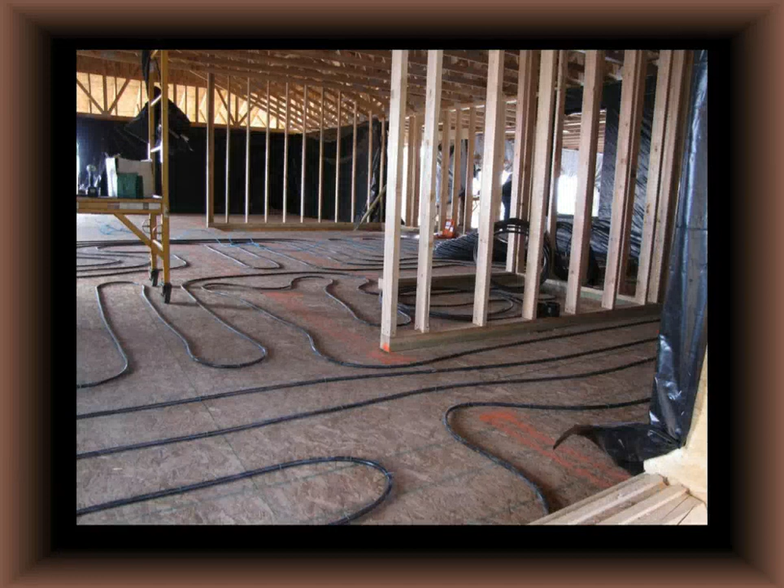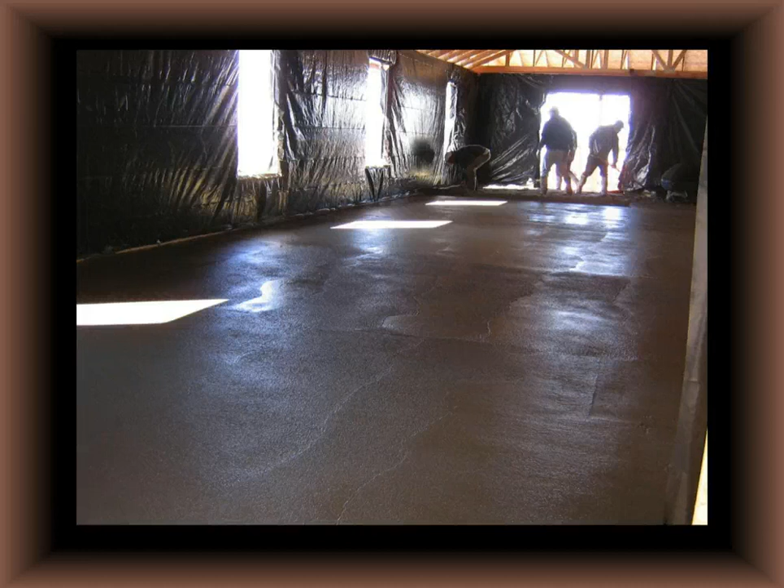The tubing in the basement is for radiant heat. This is hot water, radiant or hydronic hot water heat in the floor. There's an insulation blanket underneath, tubes laid down, and then concrete poured over top of that. Same thing upstairs, where you have the flooring, tubing in the floor, and concrete poured over top so it heats that concrete. This is also part of the thermal mass that the sun shines in through the windows upstairs and downstairs. Take a look at it now.

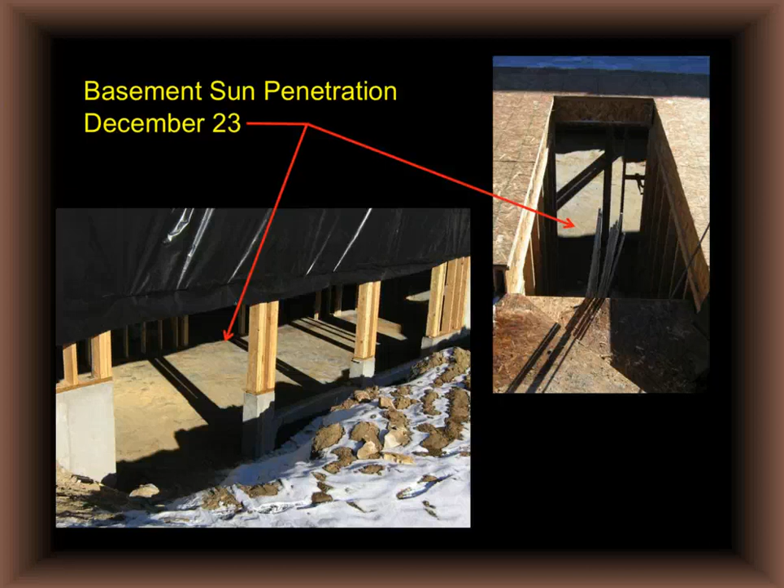This has been kind of fun. Here's the basement sun penetration on December 23rd, and you see through those lower windows it penetrates deep into the house. In fact, it would go a little deeper because that plastic is covering up part of it. Going upstairs and looking down the stairwell, you see how it's coming more than halfway across the basement, all this wonderful sun pouring in on that insulated concrete floor that also has the ability to be heated with the radiant heat. Here we have April 16th.

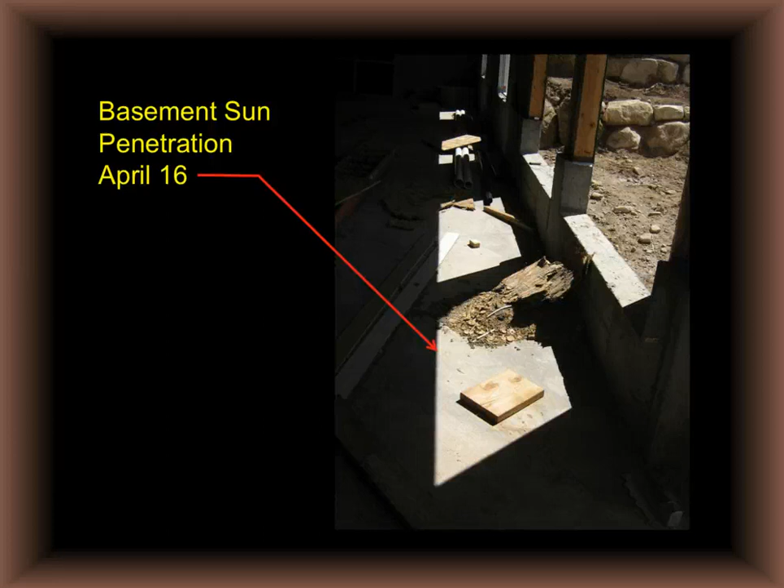Now we're into the spring. The sun is climbing higher, and you see that it's not penetrating very deep into the house. And then we come right up into recently, and you can see that during the summer you have complete sun exclusion going on. The sun will not shine through those windows at all.

Totally passive. It's just calculating and using the overhangs just right so that when the sun is low, it's pouring inside, and when the sun is high, it's being excluded by these overhangs. Nothing to move, nothing to break. It's all very automatic. Here's looking west along that south wall, and you can see the amount of solar gain, and that'll shine inside on that concrete floor upstairs, and then onto the concrete floor downstairs.

And by the way, this concrete floor, when it's poured over wood like that upstairs, it's not as hard as you think it is because there's still a little give to it, still a little bit of flex. And then you use area rugs where you're going to be walking so that it cushions things a little bit.

Now here are some other features that are very important to this that I wanted to see done. Metal roof—this is for water collection. In this area we live in a desert, and we want to capture water coming off the roof, and the metal roof is the most effective for that. If you have a shingled roof, whether wood or asphalt, the first eighth of an inch of rainfall gets sucked up into the roof itself. In the case of a metal roof, this is a turn pan metal roof, it just wets the surface, takes very little, and can run off and be collected.

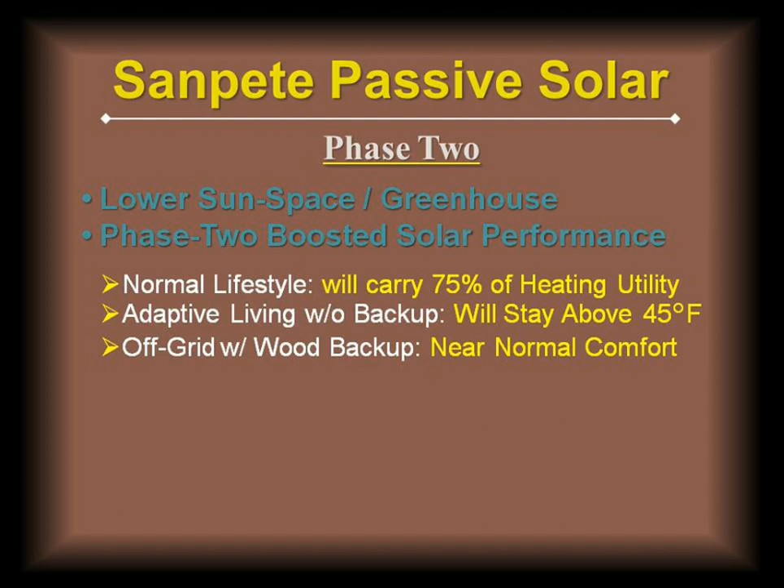Then you take a look at phase 3, where you can add in radiant floor heat. You can now use some solar to heat that if the natural gas is gone, and or a wood boiler that'll augment the natural gas. You can improve the thermal efficiency of the home some more with an upper deck sun space, and then a little more boost in solar performance.

And now at a normal lifestyle, the 72-degree thing, at least 90% of the heating utility would be covered. If you'll adapt your lifestyle and say, I'm going to allow this house to get down to 65 degrees, you'll be at 100%. If you have no backup, I would predict that house would never drop below 50 degrees once you've done these things to it.

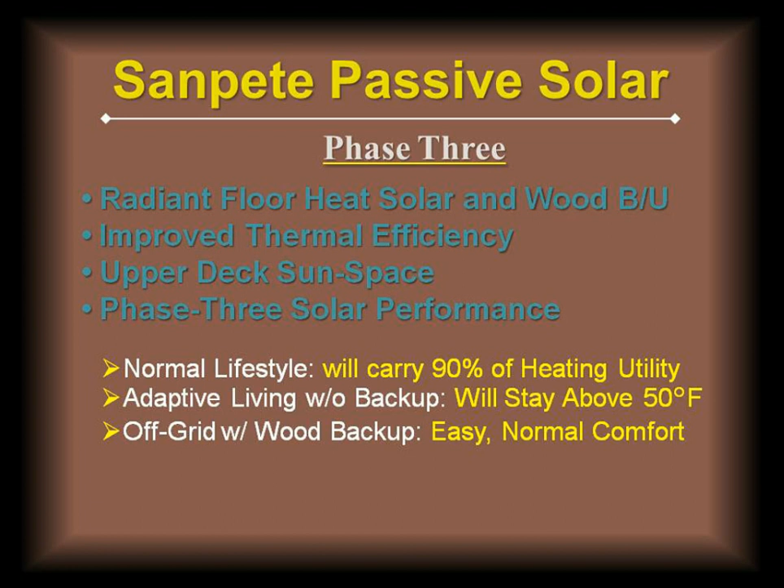And with off the grid and using the wood backup, it's easy, it's normal, and it would be very, very comfortable. Well, some ideas there about this spaceship Earth that's flooded with all the energy that we need every day flows to this Earth if we would just capture it.

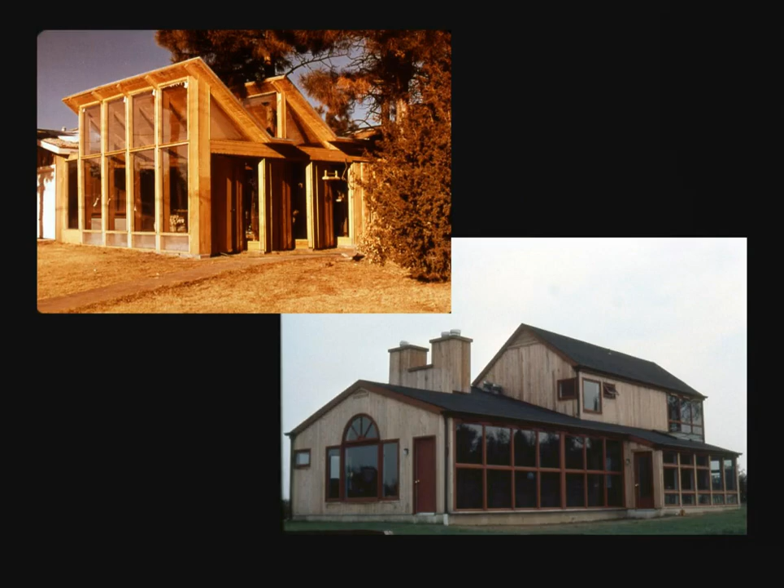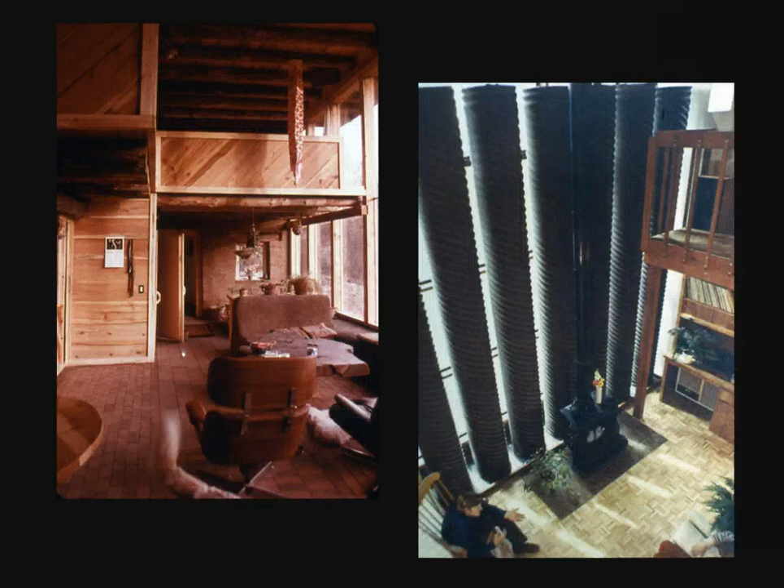Some of these sun scoops, different styles, different architecture, different looks. You have to decide what it is that you might like to have, what you would be comfortable with. Obviously, it's going to look a little bit different because you're going to have more glazing on that south side, just because that's what you're trying to do.

Interiors may look quite unusual or may look fairly normal, depending on the type of structure that you use, the type of finish. You can have attached greenhouses you would add to the home. You can have all kinds of different looks.

Well, when that sun comes up, and something I hope that you think about, is it comes up particularly in the cooler parts of the year and you feel that energy striking you. Boy, wouldn't it be nice to bring that into your house. That's something you can do.

So if you take a look at this concept of the loss of the utility infrastructure, particularly thinking about heating, it really won't be a threat to you if you've done some things. Number one, you have knowledge of your options. You understand how and why things work. And if you remember, my formula for knowledge is K equals I times E. Knowledge equals information multiplied by experience.

You need to play with these things. If you have knowledge of proper equipment, how to operate and maintain them. If you practice now and enhance your conservation of fuel and power. If you're part of a true community where you can work together, you know how to scavenge some fuels and alternative kinds of things. If you can produce a little bit of electricity, not very much, just a little bit, and you're prepared to use solar energy for heat, and you have adapted your lifestyle, your thinking, to something that would actually be practical.